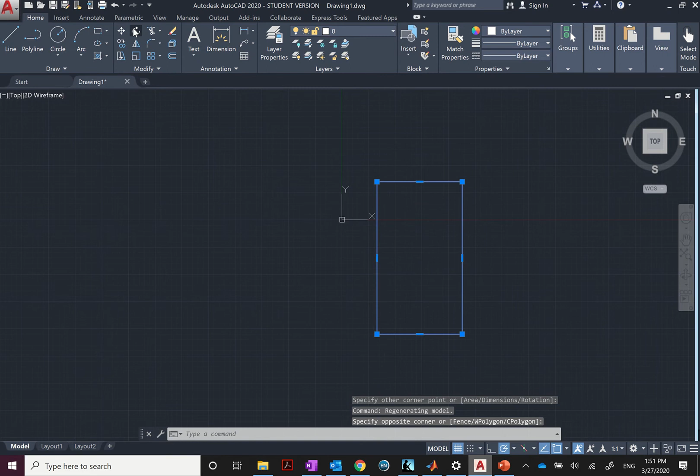Oh, this box came out. Let me rotate it. Okay, so that's the 40 by 70 box. Let's move it somewhere up here.

Next is we got this R20 radii, and this radius ends at this angle of 100 degrees. So I think the key is figuring out the relationship between this arc on the bottom, which is 75, and the top one, which is this one.

So to do that, we're going to draw the angle, an angle of 100 degrees. And it's symmetrical, so I'm going to draw 180, and it's symmetrical, so it's 40 on each side. Okay, so let's go here, and then I'm going to draw a line. Let's make it whatever, the length doesn't matter, let's make it 80, and then the angle is 40 degrees.

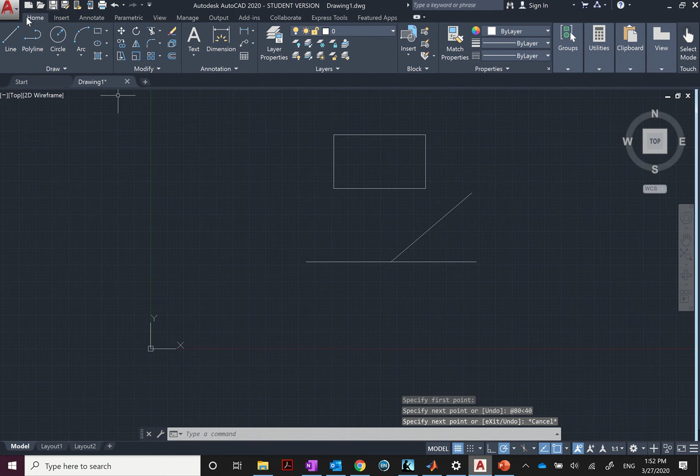All right, and then another angle, which is going to be at 140. Exactly, so it's going to be, let's make another 80, and then this is 140. Okay, so I made my 100 degrees on both sides. Let's verify. Okay, I got my 100 degrees.

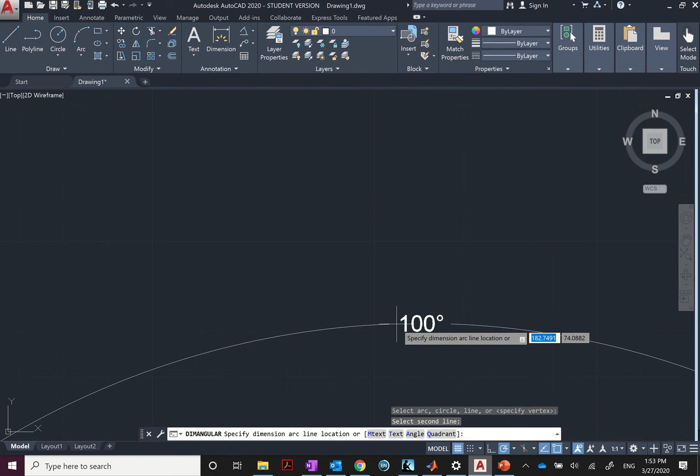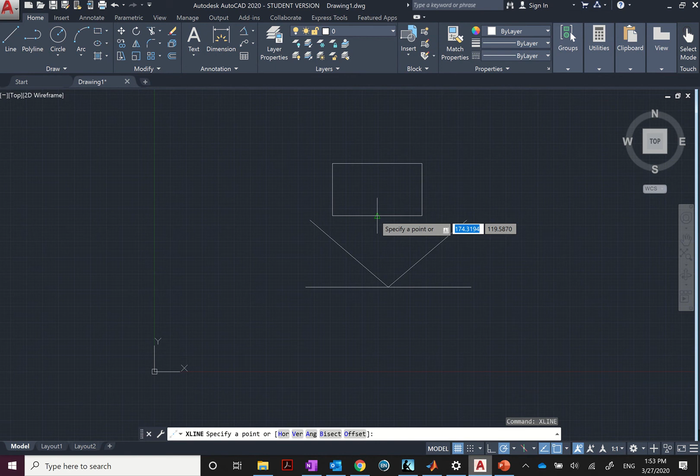All right, so next, let's just get rid of this. Next I just need to align that angle to be symmetrical by this top box. So I'm going to use an X line. Let's go here, sorry. And then I'm going to go onto the center of this and to the center of this. And this is the axis of symmetry.

So let's pick these lines, and I'm going to move them from here to here, aligned with this. Now, let's look at the drawing again. Now I have my 100 degrees.

I need to make my R75 arc. This 100 degrees is the center of this R75 arc. So I'm going to go here and pick an arc. I want to pick the center, then start, then end. So this is the center here. And then, oh, I gotta know... I know the center, I know...

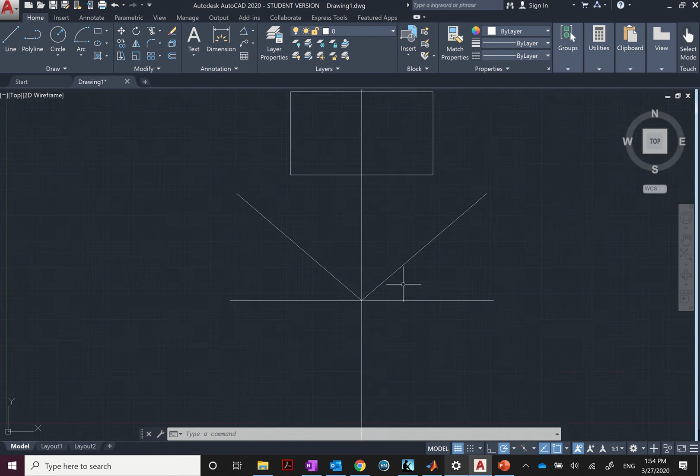So to specify the location of the center, I need to figure out the diameter. This is a 75 diameter, so I need to measure here, 75. So how much is that? I can go here. Sorry.

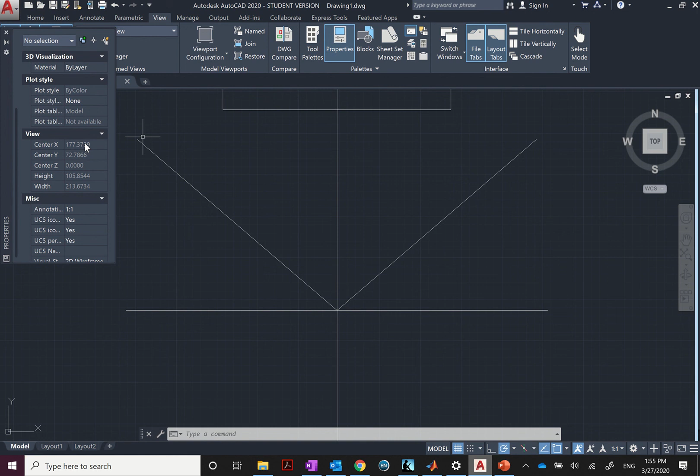So I need to change the length of this to make it exactly half the 75, because this is the radius. So I'm going to go to view and tool palette—not the tool palette, sorry, the properties. Let's close this, and then let me pick this. And then the start X, the start Y, the Z and X and Y, and then the length—this is 80, and then the angle is 40.

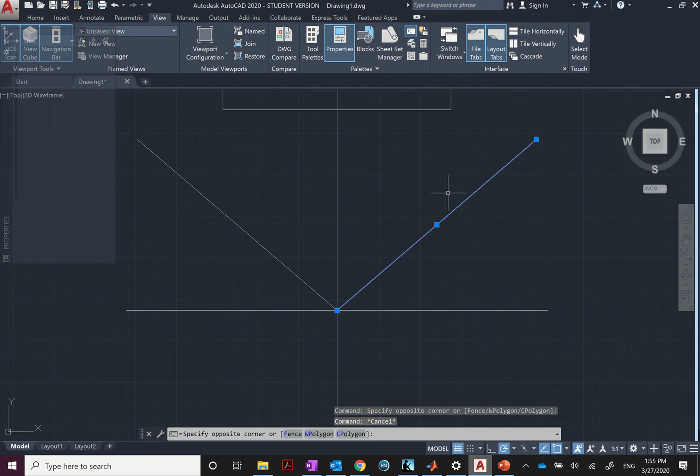So I need this to be half of the 75, which is 30... let me grab my calculator. 75 divided by 2 is 37.5. So this has to change to 37.5. So I can go here and delete this guy. Let me make another line from here, and I'm going to make it 37.5, and then this angle is going to be 40.

All right, now I need to do the same here. So I'm going to take this guy, and I'm going to make this 37.5, and I'm going to make this 140.

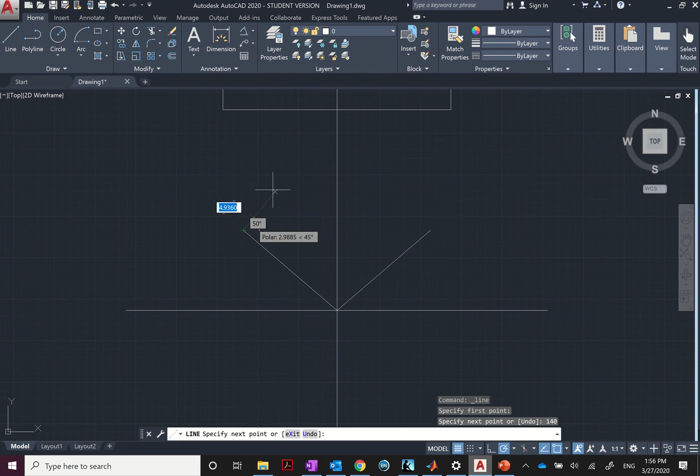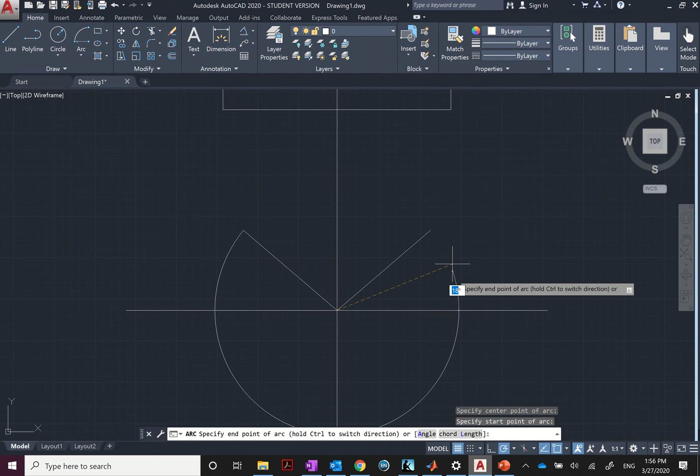And then I'm going to go to arc. I'm going to pick center, start, end. So I'm going to pick here, here—oh, so I got to do it the opposite. So I'm going to pick center, start. What happened? So center, start, end. So I'm going to take center—this is my starting point, and this is my ending point. So that's this part.

So now I need to make the last part, which is this R20. It's an arc that starts here, ends here, and is tangent to this one. Okay, that's the only way for it to be, tangent to this one.

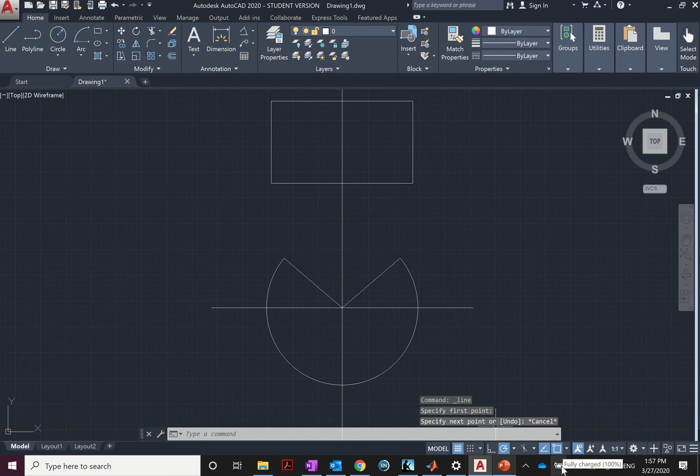So to make this, I can start by this... sorry, I'm just thinking how to do this part.

So these are two arcs; they start at this point and then they end at here, and the radius is 20. They start here and here, and they end tangent to this one.